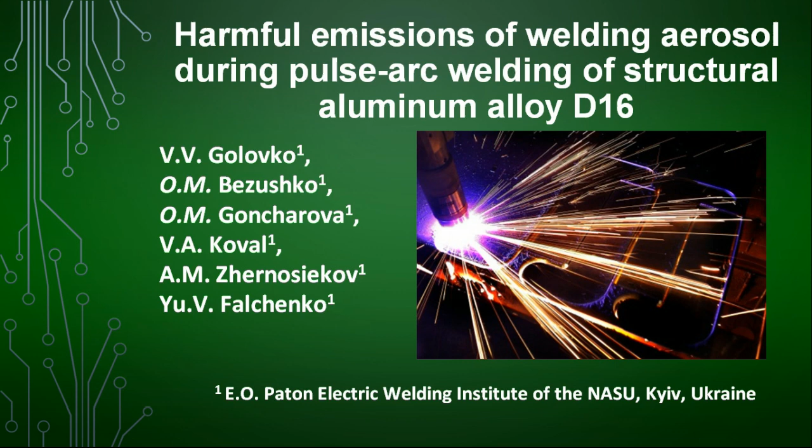Topic of the report: harmful emissions of welding aerosol during pulse arc welding of structural aluminum alloys D16. Aluminum dominates the manufacturing industry and is second only to steel in total industrial consumption. Aluminum is absolutely unique in terms of physical and chemical parameters, having the following characteristics: low density, lightness, ductility, resistance to corrosion, thermal and electrical conductivity.

Why is welding aluminum challenging? Welding aluminum is unlike welding steel or iron. There are several challenges you should expect to run into because of the unique composition of aluminum. The greatest of these challenges are porosity and thermal conductivity.

Aluminum and its alloys have a considerable tendency to superficial oxidation in air. That is why their welding is conducted in an environment of protective gases, inert argon or helium, and their mixtures, to form a high-quality weld when welding aluminum alloys. Non-fusible and fusible electrode welding methods in an inert gas environment are more often used.

Aluminum welding produces hazardous fumes, which create significant health risk for the welder. Welding aluminum produces tiny particles of aluminum, aluminum oxide and other metals found in aluminum alloys, most commonly silicon, manganese, copper, zinc, iron, and magnesium.

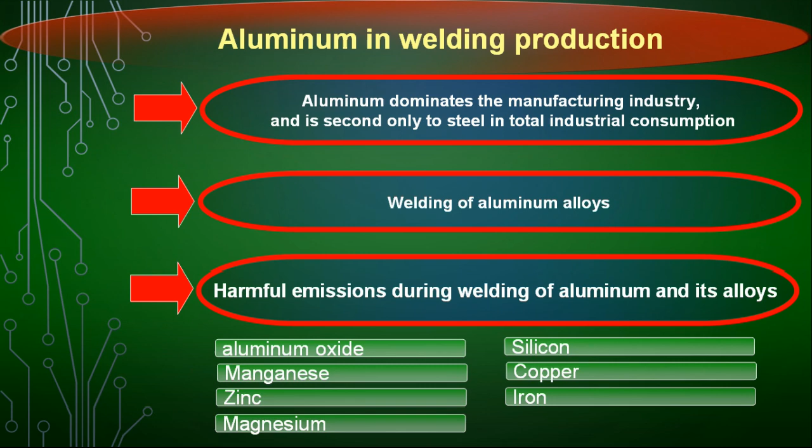Numerous studies show that, accumulated in the body, aluminum acts on brain cells, causes anemia, arthritis, suppresses the production of gastric and salivary enzymes, and contributes to the development of osteoporosis and rickets. A welder can get sick with irreversible aluminosis, a physiological change in the lungs that develops when inhaling aluminum dust.

In accordance with the international standards ISO 14000, welding materials are subjected to new requirements for their continuous improvement in order to minimize the harmful effect on the human body, and according to the standards of DSTU ISO 15011, welding materials must be constantly monitored for occupational safety indicators.

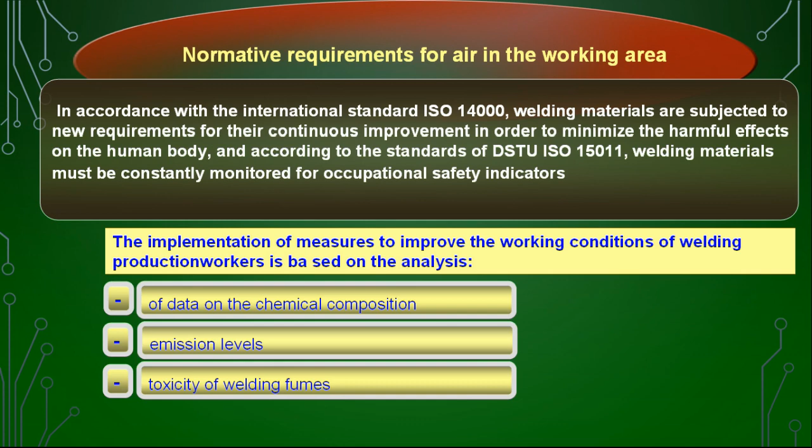The implementation of measures to improve the working conditions of welding production is based on the analysis of data on the chemical composition, emission levels, and toxicity of welding fumes. For this, a primary sanitary and hygienic assessment of welding materials is carried out by the method of trapping welding fumes and determining their quantity and chemical composition.

Process of the welding fumes. Under the action of the heat of the arc, a drop of liquid metal is formed and grows on the end of the wire, which is held by the forces of surface tension. Partial evaporation of the metal occurs as a result of the high boiling temperature of the metal and significant heat of evaporation. It passes through the protective gas supplied to the welding zone. Part of the vapor might condense into droplets, oxidize and turn into small, solid particles of metal oxide, which form fumes and always surround the welding arc.

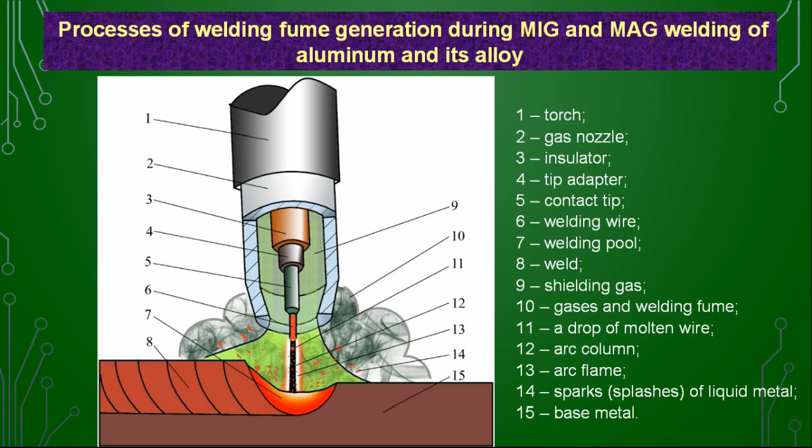The E.O. Paton Institute of Electric Welding conducted a study of the chemical composition, emission level, and toxicity of aerosol formed during mechanized welding of aluminum-based alloy using methodological standards of the ISO 15011 series. The purpose of the work is to carry out a sanitary and hygienic assessment of the nature of aerosol emission during pulse arc welding of structural aluminum alloy D16.

Welding was performed with two brands of solid wire, ER4043 and wire 2319, with a diameter of 1.6 millimeters, which are serial, certified and widely used in industry. The following indices of welding fume formation were determined: emission intensity, chemical composition of welding fumes, and class of welding aerosol.

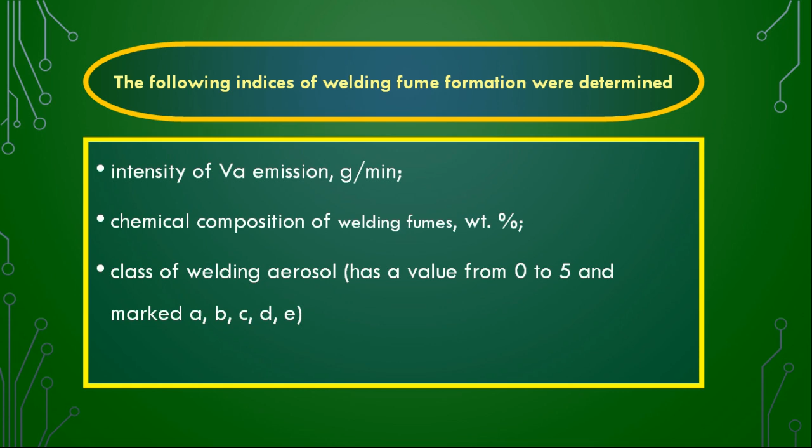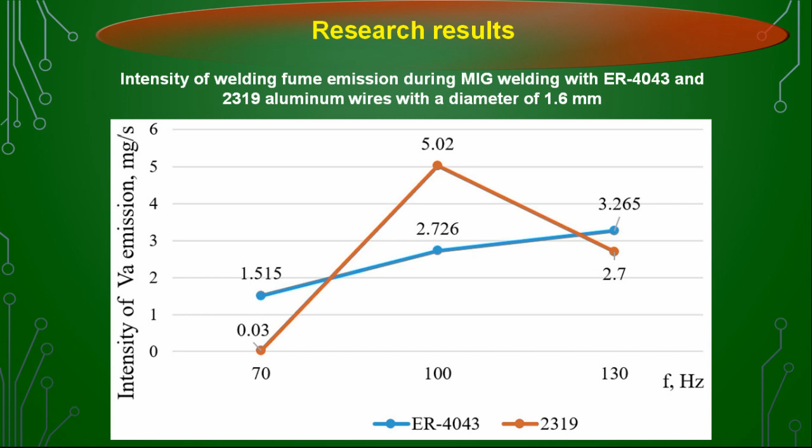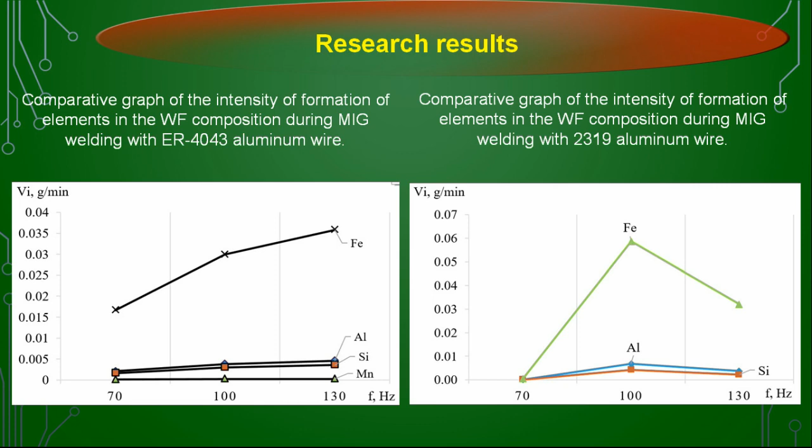As we can see, a large mass of toxic elements in the welding fumes of MIG welding with aluminum wire ER4043 and 2319 consists of such components as aluminum, iron and silicon. The emission intensity of these welding fume components increases with increasing pulse frequency.

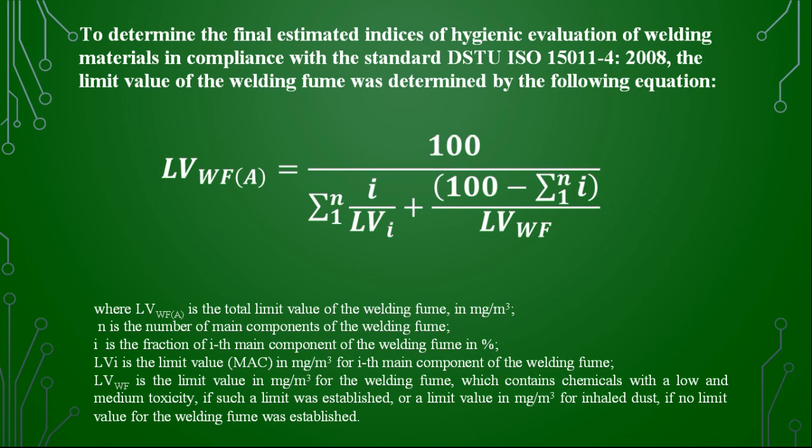To determine the final estimated indices of hygienic evaluation of welding materials, the limit value of the welding fumes was determined by the following equation. The indicators of the hygienic assessment of welding materials determined by the calculation method according to the DSTU ISO 15011 standard are given in the table.